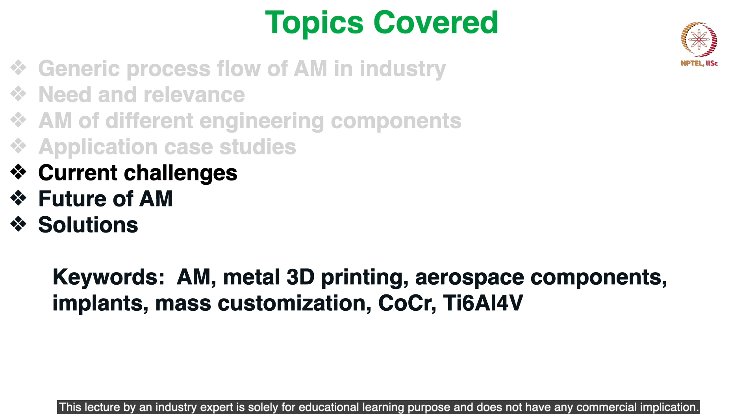Let's continue with our next topic. So we saw in general the AM flow, how the technology of laser powder bed fusion works. We've seen different case studies. We saw multiple of the application use cases, how industry has been using it, from medical to automotive to aerospace and many other engineering cases. Now let's look at some of the actual practical challenges that are there in this whole technology and what sort of solution we can offer to the industry.

Now this has been our additive journey in terms of what we have been working on, from design for additive manufacturing to printing multiple parts, manufacturing multiple parts to understand the customer requirement, producing them from rapid prototyping to batch production to volume production. We've understood and qualified new materials and offered them for different applications, and finally we've come up with our own indigenous development of products and solutions.

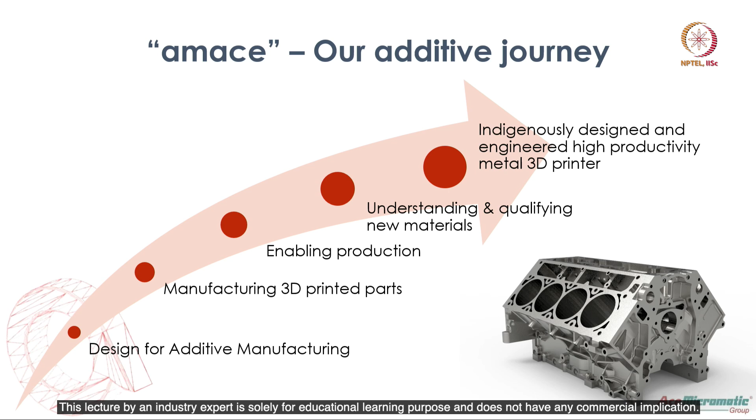Now before we move further, let's look at the challenges that are currently there in the industry. So if you look at it, currently the lower adoption of this technology is largely because of low productivity rates. People are still comparing this technology to conventional manufacturing. In an automotive or conventional manufacturing route, you can get parts out in a few seconds or in a few minutes; this still takes many hours, if not longer.

So your production rates are lesser, and the cost of the equipment itself is very high. People believe, or at least the product costs are very high, which is making it very challenging to adopt it much better. Maintenance costs are high because of the low volumes. To maintain them, you have much higher spare part costs for this equipment. Your conventional manufacturing process is any day cheaper or much more cost effective than the printing route or the additive manufacturing route.

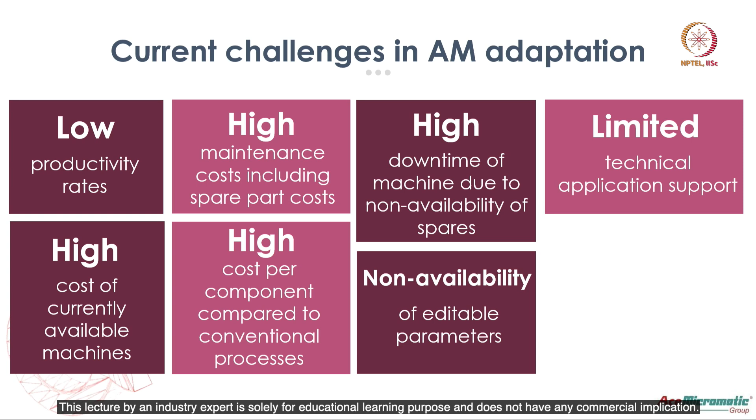Then, when the machine goes down, availability of spare parts or having service engineers is another challenge. You have a lot of restrictions in the process, so you don't have a lot of flexibility in the parameters and using them. Then you have limited application support. There's limitation in terms of the material, suitability of the material for the end application. You have limited application knowledge in the industry. So this is another limitation that is there.

And finally, we are unable to monitor. We don't know the productivity. We don't know how this performs in the actual application, and what sort of results we get out of this. So these are some of the challenges which have been there for many years, which is causing lesser adoption of this technology by the industry. Our intention is to see how we can change this by providing solutions around that.

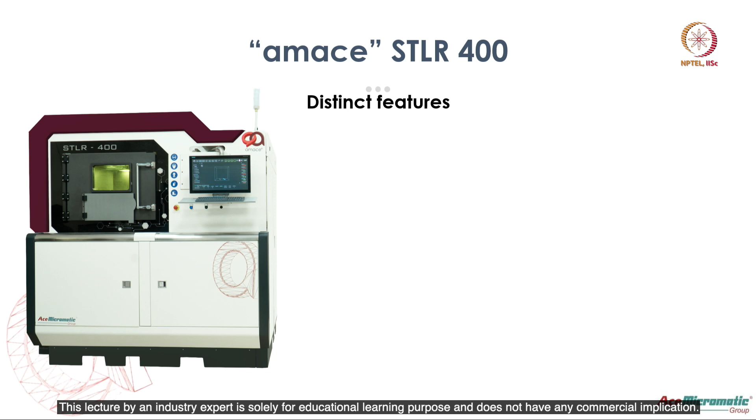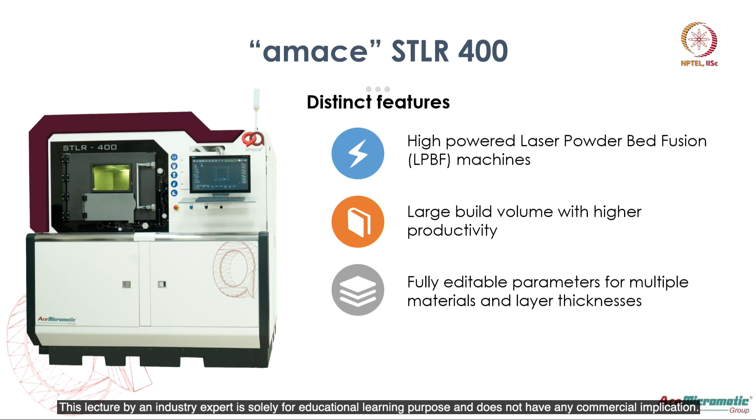So this is our flagship product that we've launched, which has high laser power, which can address the productivity issue. It comes with a large build volume. Currently the machines in the market are largely small and medium size, but our intention is to address larger size requirements, with complete flexibility in development. We co-create materials, we co-create applications along with our customers, and much higher printing time in the whole process.

Now we've included a lot of smart features on this to make sure the whole raw material processing happens faster and is much smarter and intuitive in nature. There's a lot of real-time monitoring, and it gives you remote connectivity. You're able to monitor and watch what's happening in real time. These are some of the challenges for which solutions have been found by us.

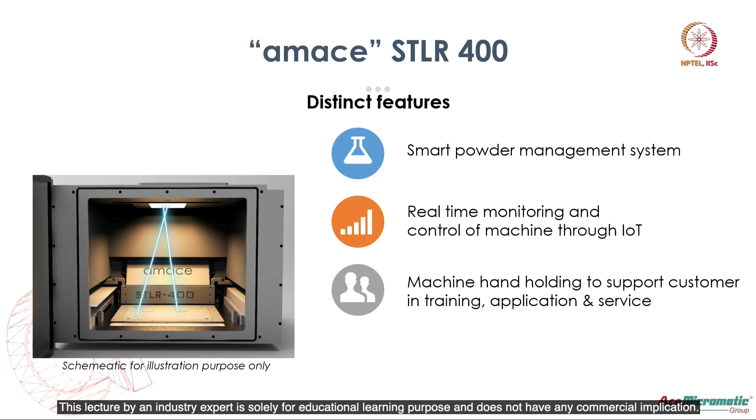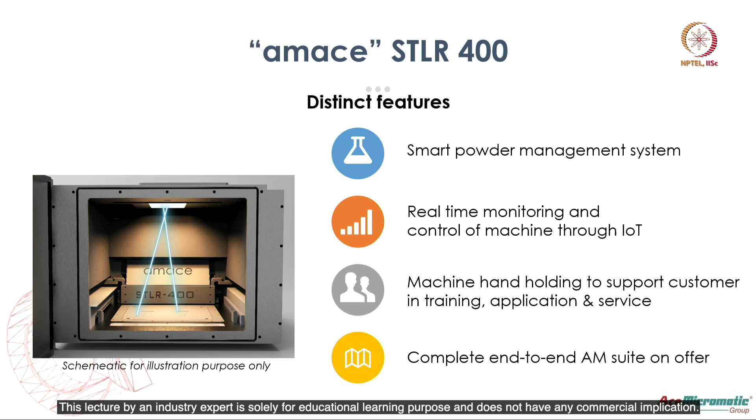Complete hand-holding. There's a lot of awareness building and hand-holding going on for better adoption of this technology. A lot of application experts interact with customers to give this solution. And we give an entire end-to-end solution for additive manufacturing to our customers when it comes to better utilization of this technology.

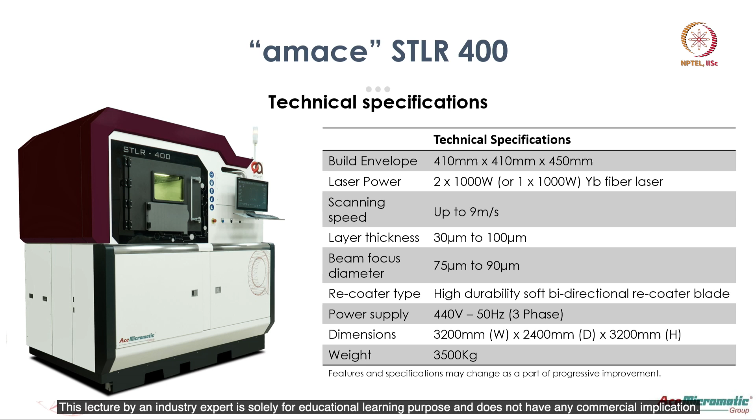So what we've developed as one of the first metal 3D printers in the country is this machine called the STLR 400. It comes with a large bed of 400 size and multiple lasers, and gives a lot of flexibility in layer thickness, where one can go from a very small layer thickness to a high one. It comes with a laser spot size of about 75 to 90 microns. A lot of innovative features have been adopted in the product itself. We also have a couple of other products.

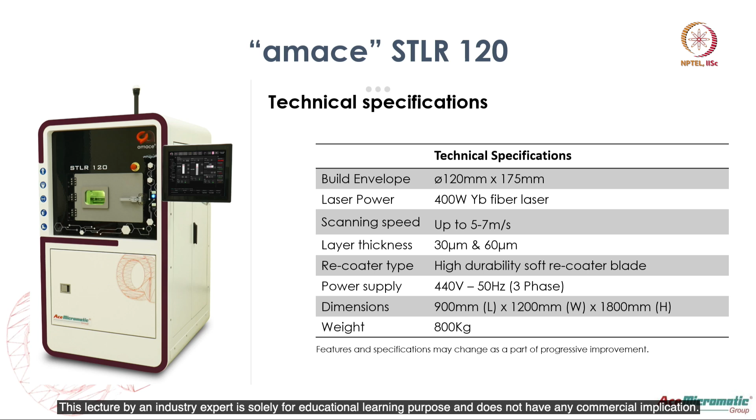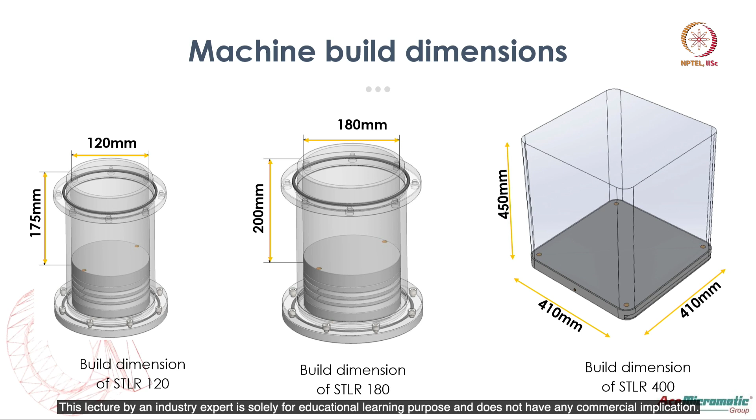We call them STLR 180, a smaller one, more from a small size, faster production perspective. And we also have an STLR 120, which is a new launch for research and lab applications, where very small components can be done in a very fast turnaround time. So these are some of the products that we have from a size and build volume perspective, which have been serving defense, space application, aviation, medical, automobile, and mold making engineering applications.

So some of the materials that we've worked on or we're still working on include these, and not limited to these. You have aluminum alloys, different types of aluminum alloys in different layer thicknesses for various applications. Aluminum alloy gives you not only lightweighting as an application, it also comes with many other features in terms of non-corrosiveness and is very stable in terms of the reaction to environmental materials.

You have stainless steel, different grades of stainless steels which have been worked on. SS316L, we have SS304, SS310. We've worked on 15-5PH, 17-4PH, and many others. We have tool steels, titanium for aerospace application, titanium for medical application. We've seen maraging steel, plenty of applications that have been done.

We're working on some combination of materials for specific use and application today, be it a magnetic material like FeCoV or diamond based material, again for some high hardness applications. We've worked on cobalt chrome, specifically for medical application. Copper chromium zirconium is another interesting material which we've worked on and developed and are offering for customers.

So you can see one of the biggest growth areas today for additive manufacturing is material development suiting specific applications. Still, this is not a match compared to what is available in the conventional manufacturing route, where we have hundreds if not thousands of materials for very specific applications.

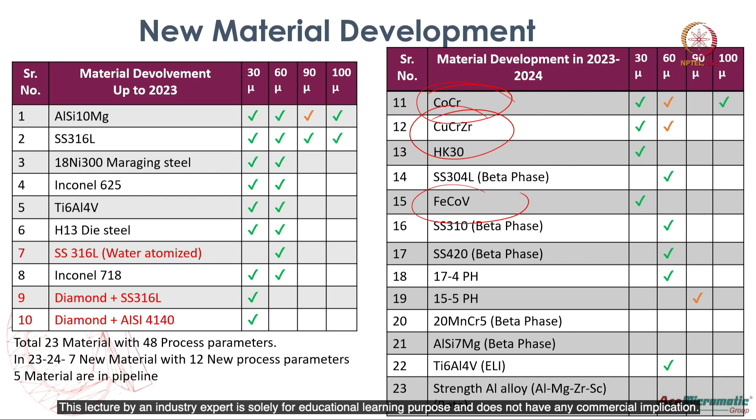What we end up doing is identifying what material meets what properties of the end application, and we try to match them as closely as possible, either in its native form or after some treatment, be it heat treatment or some surface treatment processes. So we meet the end application properties as closely as possible to make sure that the materials can be used by 3D printing.

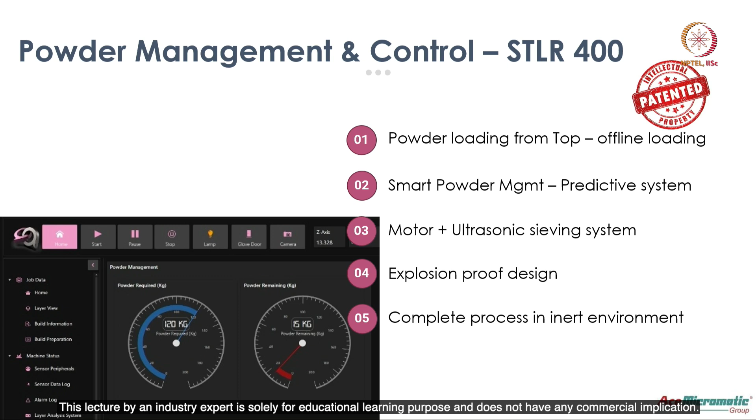Now, some of the other aspects that are required are software. Software is a key aspect. So we have a lot of software being developed in-house, be it from powder management to the screen that you're seeing here, where a lot of intuitive features have been built in to make sure we have smartness included. A lot of color-coded screens are provided to ensure all the necessary aspects, including IoT and other features, are demonstrated and provided to the customer. So making it very user-friendly for the end user when they are putting it all to use.

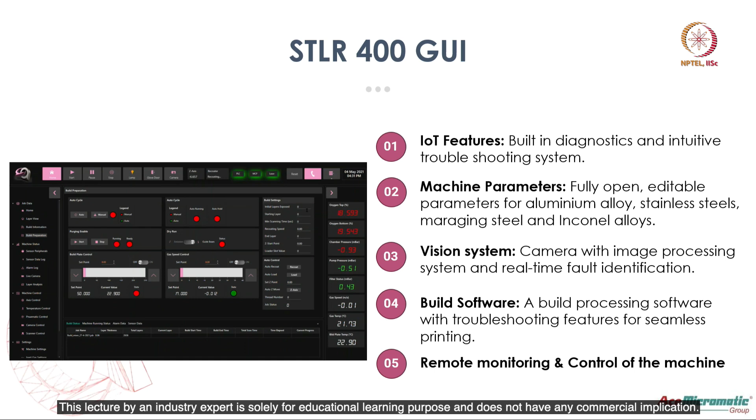This is the software. You can see all the color codedness here, where the operator or the user doesn't have to remember the parameters or the features that are there. Green and red colors are sufficient for them to understand how this software can be used, making it very user friendly and interactive.

Today, something that is missing in the conventional 3D printing route is having reports, I mean, to have data or information of the printing process. So these are interesting aspects where you're able to capture what were the process conditions during printing, after printing, what sort of interruptions we had during the printing process, what material got used, who was the operator, what was the filter status, and how the transition happened during the printing process. All this is captured and provided in the form of data.

This data is available for any processing in terms of any data generation. All this data will be stored and available for any model that is to be built around statistics or for any future development of software by the end customer themselves, or co-created along with us. So all the data is recorded and then made available for the end customer.

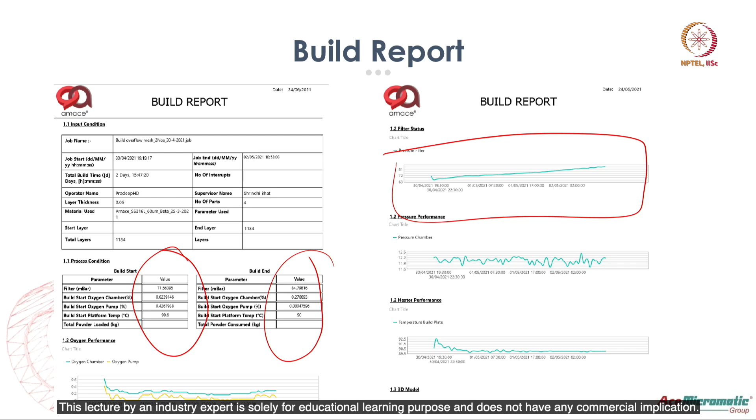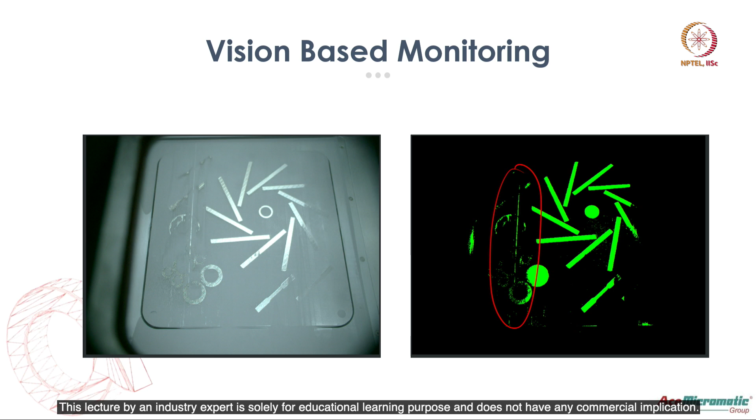We have in situ monitoring, where we have a camera vision based system. Again here we have an interesting software that has been put together, where on an edge detection basis we are able to identify any warpages, any sort of defect that is potentially arising in the whole printing process, and the operator is free to decide if this has to be continued or stopped, and then further modification has to be done. So such intuitive solutions are also provided.

So you can see the part that I showed earlier, which was printed in Inconel 625 in as low as 19 hours. This is basically an exhaust mixer of a rocket engine, which conventionally followed a different route of manufacturing.

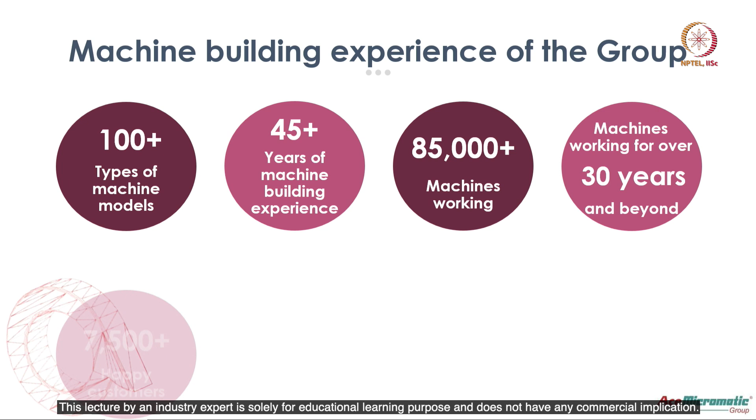Now, we come from a machine building background, so we've manufactured varieties of machines with over 85,000 machines installed all around the world, many years of experience, many customers, and many of them are repeat customers. We are driven by technocrats who founded the company and are running the company here. And we offer end-to-end solutions.

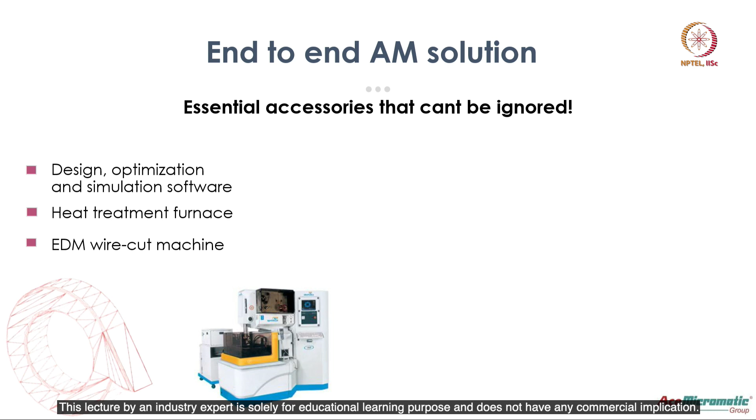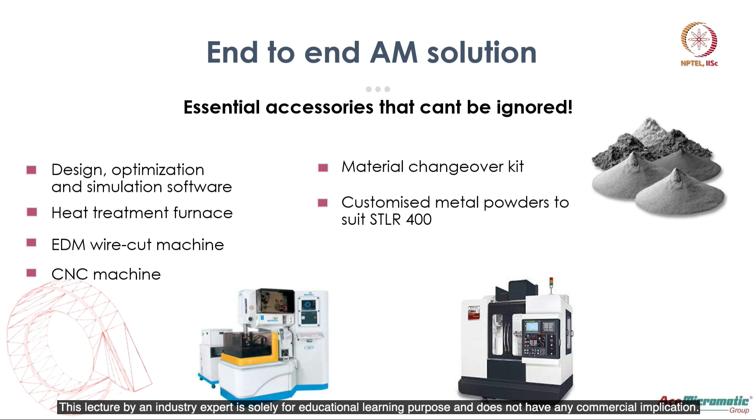It's not just one technology, but the complete design to manufacturing process and finishing process is what we offer as an end-to-end solution, including material development and raw material provision and completely finishing the part and getting it for final use. So this is what we have on offer, and we make sure the entire solution can be offered by the group here.

A lot of R&D has been happening. We've collaborated with different academic institutions in and outside the country to learn faster and accelerate our development processes in the whole journey of what we've achieved till now. One of the unique aspects that we are working on is to see how we can make this whole solution available for mass utilization in the country and outside.

So if you see the original comparison between metal 3D printing and conventional manufacturing, there's a huge gap in the productivity and the cost per component currently. So our intention was to see how this gap can be bridged. So we built a larger size machine, so you can produce more components if they are smaller in size. Then we have done a multi-laser solution which can print faster and produce many more components, and a combination of higher power along with this allows you to print at a higher layer thickness, making the whole process even faster.

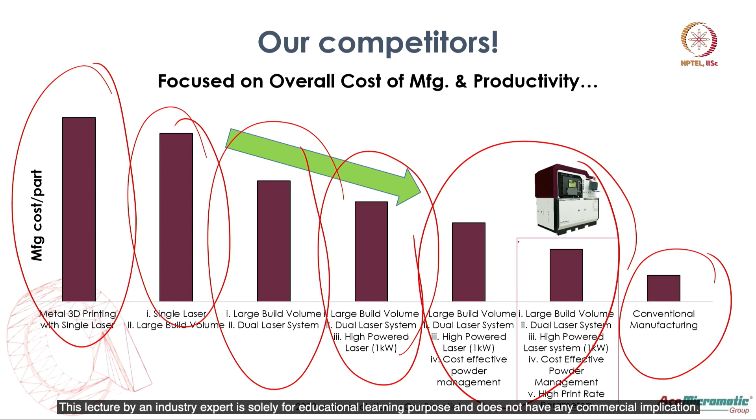Then we also work with more cost-effective powders to ensure that not only the equipment cost but also the raw material cost is much lower. And as a combination of all this, the intention is to see how we can come much closer to the conventional manufacturing process. Conventionally, the multiple can be anywhere between 10x to 20x times conventional manufacturing. Our intention is to see how it can come down to at least 1.5x going ahead, so that 3D printing can become more and more affordable. This is just a tangible multiple of what the manufacturing cost is.

The other intangible benefits the technology can offer are lightweighting, saving of raw material, much faster development and complex geometries. All those are additional benefits that manufacturers are exploring. Today, in many cases, as I explained earlier, where the volumes are very low, be it engineering, energy sector, defense and aerospace applications, people are finding this much easier and faster to adopt. So today people consider this one of the key manufacturing technologies.

If you look at advanced manufacturers like Boeing and Airbus, they're all designing aircraft to be launched in 2030, 2035, which will have a significant amount of additive manufacturing in the whole manufacturing process flow. The advantage this offers is lightweighted structures. Today, if aircraft are lighter, they're able to fly much longer. Today there are aircraft flying more than 20 and 22 hours, which earlier used to be not more than 10 to 12 hours. So it gives you shorter journeys and better comfort to the end user.

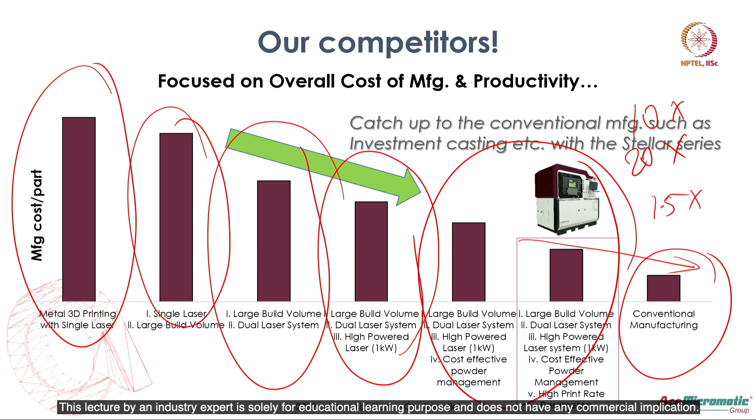Coming back here, the advantage we are looking at is bringing the manufacturing process costs much closer to the conventional manufacturing process. Some of our current research areas are multi-lasers. Today, as we know, the number of lasers is going to be contributing to the productivity.

So what is currently taking many hours, or many days, the idea is to bring it down to maybe less than a day for making medium-sized parts. It still has human dependence, so trying to see what amount of automation can be built into the whole process, be it from a design perspective, what can be automated, taking, as I explained earlier, the human involvement in identifying components, screening these components.

Today, if you see, there are only a limited number of components that actually have a value proposition to convert into 3D printing. Not all parts are readily suitable for 3D printing. It will have to be converted either by doing a lot of design for additive manufacturing, wherein you're making it lighter, or integrating multiple parts into individual parts, thereby giving you that value,

or by maybe doing something more complex in the whole process. So that's something that we are working on, starting from software automation to identifying parameters, manufacturing process identification, and the printing process itself, trying to make it more automated. And then once it's printed, the finishing of it, trying to see how that can be automated in the whole process. So automation is very key.